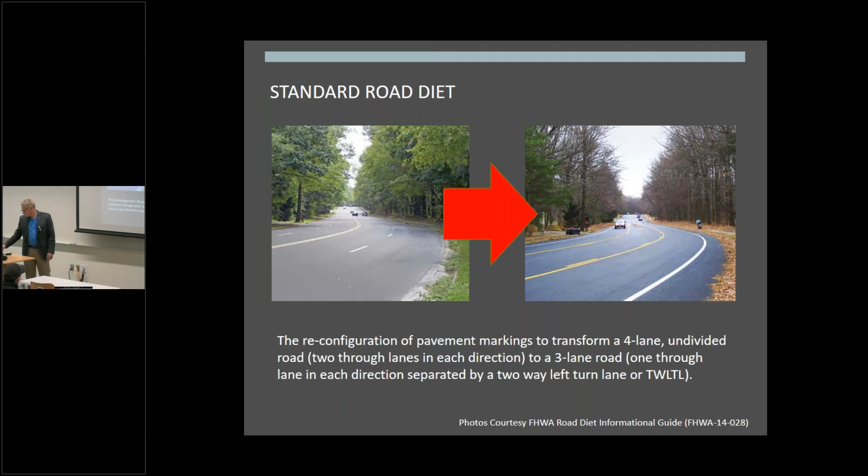All right, so we're going to refresh ourselves on what a standard road diet is before we go into the road diet version 2.0, or what I call road diet plus sometimes. The word road diet can be used to refer to any process where you reduce the number of lanes on a current roadway. But most commonly it's used to talk about a reduction from 4 lanes to 3 lanes, where you've got a 4-lane undivided road, as you see in the picture here, and it's converted to a 3-lane road with a lane in each direction and a middle lane which supports left-hand turns, known as a 2-way left turn lane, often called a twiddle, which I will be using throughout this presentation.

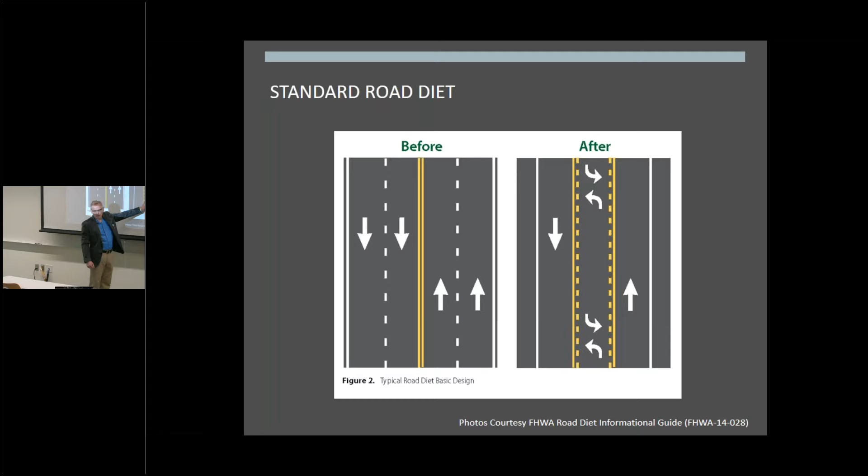Here's a plan view, schematic view, 4-lane undivided highway, converted to a 3-lane road. You obviously get some liberated right-of-way. In this example, they've put in bike lanes, unprotected bike lanes. So, standard road diet. Advantages where it's applicable. The current guidance, most popular guidance, FHWA Road Diet Informational Guide, tells us that up to 25,000 ADT on a corridor is suitable for a road diet. At least Seattle's a big proponent of these road diets, and they're applying them on corridors with that type of volume.

There's been shown to be little capacity reduction on corridors, 4-lane undivided roads, which are already essentially functioning as 3-lane roads. If you consider a 4-lane road and people wanting to take left-hand turns, those inner lanes are often filled or used for motorists to stop or slow down before executing their left-hand turn. So those kind of movements reduce your capacity, and you often end up with a 3-lane road that can carry more traffic than the original 4-lane road could.

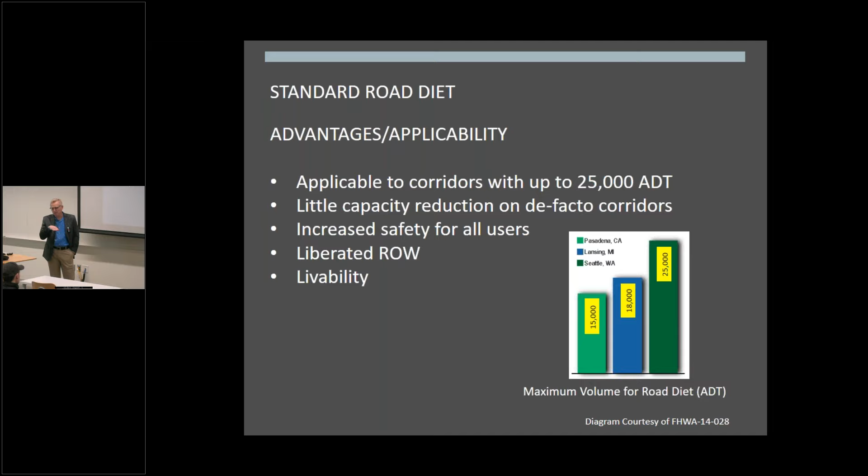Increased safety for all users. These 4-lane roads, especially when you've got a lot of those left turning movements, can be quite dangerous. You have rear end crashes. You have sideswipes when a car is trying to change lanes to avoid that car that's sitting there waiting to execute a left turn. So better safety. And you've got the right-of-way that's freed up from reducing a travel lane, which can be used to create bike lanes, bus stops, parking, whatever you want. And livability. Often a 3-lane road will calm the traffic a bit, slow down your speeds. The liberated right-of-way can be used to put in beautification components.

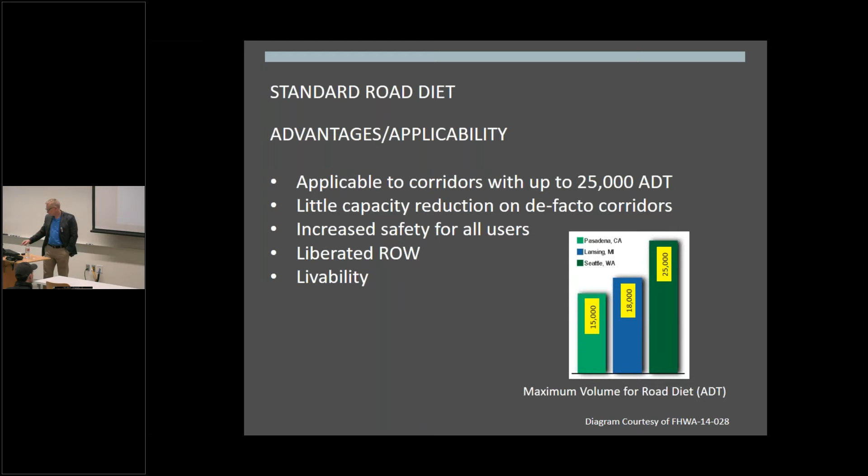Whatever a community wants to do to make that street a better street. But there are also disadvantages. They're not applicable to some corridors that might have short blocks. You may have signal timing issues, and because you reduce the number of lanes, your intersection capacity goes down. And that may not be supportable with a road diet.

If your 4-lane undivided road is truly functioning as a 4-lane road, where there are really no left-hand turn movements occurring, you do get a capacity reduction, and if you've got a corridor that's fully used, that capacity reduction might be significant. The road diet does not do anything to address safety at the intersections, nor does it do anything to address safety with your left-hand turns in the face of oncoming traffic. So these are important contributors to the safety of a corridor, which a road diet does little to impact.

The right-of-way that's liberated with a road diet can be fairly minimal. Even though you're eliminating an entire traffic lane, the TWLTL is often wider than a normal traffic lane, often 13, 14 feet wide. So you don't get that whole traffic lane back in terms of liberated right-of-way. And of course, a standard road diet isn't applicable to your higher volume corridors.

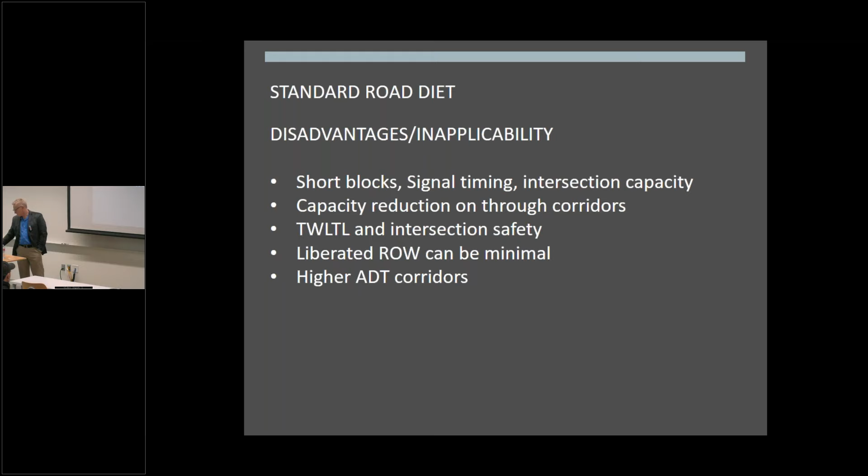So the question is, can we go one step or one lane farther? And of course the answer is yes, or I wouldn't have very much to talk about for the rest of the hour. I like to call it Road Diet version 2.0 or Road Diet Plus. And the great thing about this concept, there are no new elements, no new traffic engineering elements, no new planning elements. We have successful projects across the nation. But we're lacking both popular guidance and technical guidance, and the concept is not well known.

There are a lot of roundabout practitioners that are well aware of this concept. It is becoming more popular. I think I just saw a post from Congress for the New Urbanism. Robert Steuteville posted something on this, so it is starting to become more popular. But I think accessible guidance is one of the issues that are lacking.

So what does a corridor look like when you've taken this 4-lane undivided road and applied this road diet plus roundabout treatment to it? What are we talking about? Well, first of all, we're talking about roundabouts, at least at all the major intersections. You can still have your normal cross-street intersections, but those are to be intersections with minor roads only. It's a two-lane road. You only have 2 lanes, 1 lane in each direction. The TWLTL is gone. You've got no left turns in the entire corridor, or very few left turns.

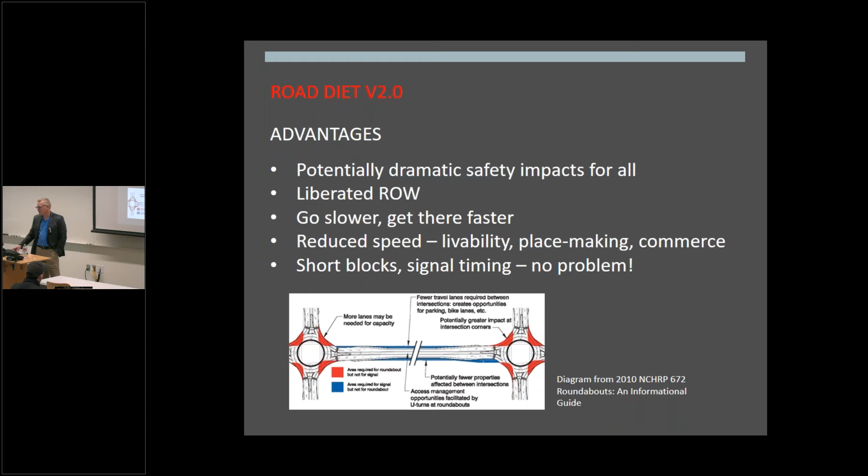Short blocks and signal timing. I say no problem here. Well, that's not completely true, but they're much less of a problem than if you're using a conventional road diet approach. So you don't get anything for free. What are the disadvantages of this road diet 2.0? Most of them are issues that need to be dealt with for roundabouts in general.

Number one, you've got small roundabouts, which means your larger vehicles may have issues getting around the roundabout. They may only be able to take a left-hand turn. Doing a U-turn may not be possible in some cases. That could be a problem if you've got a corridor where there's a lot of freight coming through. But there are ways to deal with that.

Emergency vehicles and public buses, fire trucks in particular, can have issues, again, with turning and or traversing a mountable island. A roundabout's capacity is dependent on rates of left turns and U-turns. So you've got so much capacity in that circle, and if you have a whole bunch of people coming in to do a U-turn to come back, you're going to reduce the capacity of that roundabout. So that's just something you have to take into account.

Capacity is also dependent on familiarity with roundabouts. And this is something I'll get into in a little more detail further on. But there is quite a big difference between the throughput of European roundabouts and the throughput of American roundabouts. And it's not based on design factors, it's based on the fact that Europeans have likely grown up with roundabouts, are familiar with them, know how to use them well, no big deal. With American roundabouts, drivers are not as familiar in most places, and their ability to smoothly merge into that traffic flow is less honed than their European counterparts. So you get less capacity.

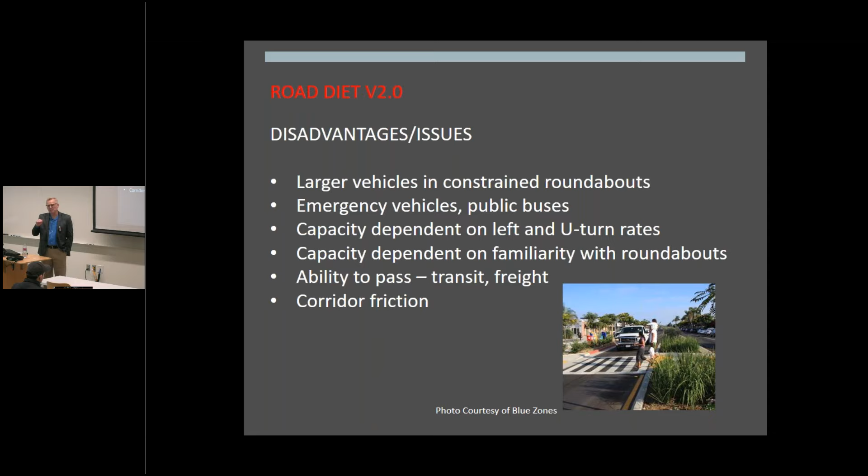So when I looked at this concept, and having been a recently converted roundabout fanatic, I couldn't understand why this concept wasn't just taking over. And so I looked at what existed out there, and I realized there's no accessible guidance for this concept.

There's actually not a whole lot of technical guidance either, but to popularize this idea, to make it more accessible, to encourage its adoption in a more widespread manner, I thought what we needed was a little bit more accessible guidance along the terms of FHWA's Road Diet Informational Guide, which has a feasibility process and some explanatory material for people who may not be as engineering oriented, but who may be important stakeholders in the process of deciding what to do with a corridor.

So I set out with my work to create a counterpart to that guide. I just went ahead and mirrored the FHWA Road Diet Informational Guide, defined the concept, talked about benefits and trade-offs, feasibility of this approach, design issues and assessment.

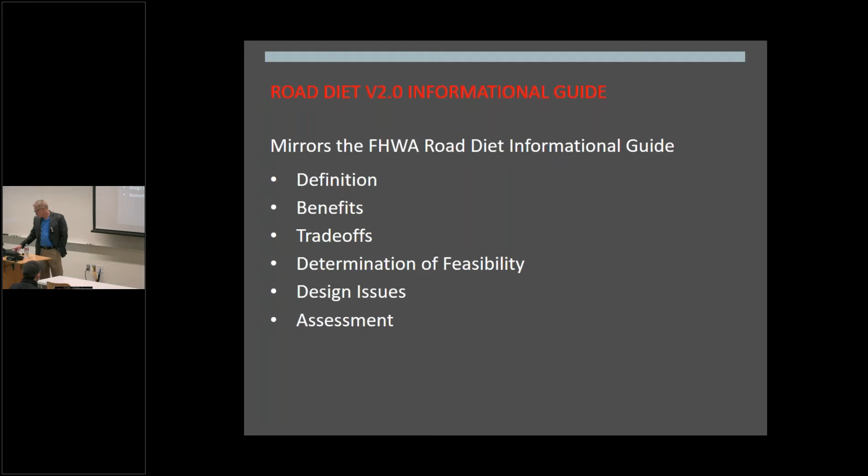And what I'm going to be talking about today is the feasibility assessment part and the work I did to come up with a cheap and easy process that people could use, say, hey, I got a corridor here. I want to do something fantastic with it. Is it feasible? And a little bit of a spoiler here. What I did came out great, but even so, it's a little too conservative, and we'll talk more about that.

So how does an agency know if a road diet 2.0 is worth doing? Well, the two major questions are, is there room at the existing intersections to place a roundabout there? One of the big barriers to tackling this kind of renovation is if you do a roundabout, roundabouts tend to be larger than normal intersections, whereas the roads in between them can be smaller.

If you're having to buy buildings and tear them down, or buy businesses and close them, number one, you might have a lot of public opposition, and number two, it's going to be pretty darn expensive to do that. So you need to know what's involved in terms of right-of-way required for those roundabouts.

And number two, what are the supportable traffic volumes for this kind of concept? You know, if I've got a busy corridor and I want to do this fairly radical concept and commit to trying to convince stakeholders that this is an idea worth considering, I've got to know that that final plan is at least going to have the possibility of supporting the volumes that you're wanting to support in that corridor, either now or in the future.

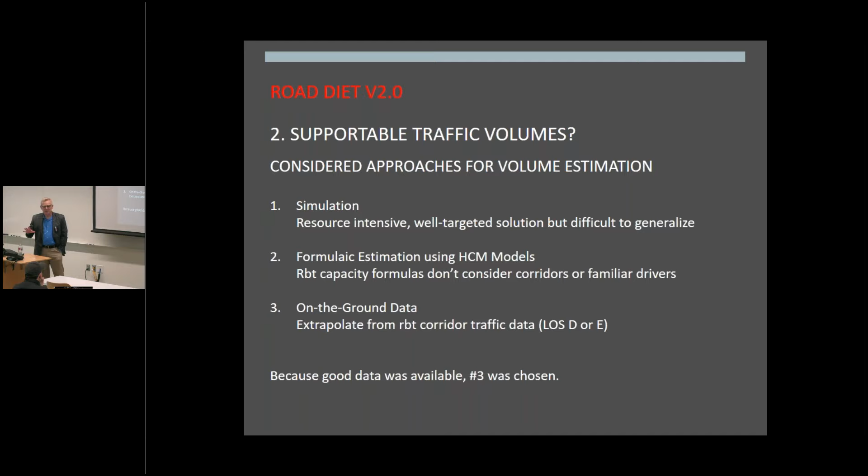So the third one was take a look at some corridor that's already been renovated in this manner and see if there might be some on-the-ground data that would tell me what these corridors can do. So I chose number 3 because I did find some good data. And in fact, the data was so good that it illuminated some drawbacks to existing roundabout throughput guidance, which, as I remarked at the beginning of this talk, I think has really been retarding the uptake of roundabouts in this country.

So what kind of data did I look at? NCHRP 772, great study. It's limited only to throughput, which is unfortunate because there are so many advantages to these roundabout-based corridors. But they had a database of roundabout corridors across the nation, and that was crucial for what I was doing.

So from their database, I looked for roundabout corridors that had at least 3 roundabouts in series, 2-lane roads rather than wider roads, single-lane roundabouts only, and didn't include a pair of roundabouts at a highway interchange, which is often something they do, which looks like a corridor, but really it's a highway interchange serviced by roundabouts.

So after using that criteria, I came up with 6 corridors that I want to take a look at. La Jolla Boulevard in San Diego, Pagan Ranch Road, Boynton Beach, Florida, Maple Island Road in Springfield, O'Neill Drive in San Juan Capistrano, West 8th Avenue in Chico, and Via Bella Street in Pennsylvania.

So I took a look at those characteristics, and I won't go too much into the details, but out of all these roundabout corridors, I chose 2 roundabouts which were representative of both the urban compact and the urban single lane roundabout. Their characteristics reflected the mean of roundabouts in that category and were examples of good use in that type of application.

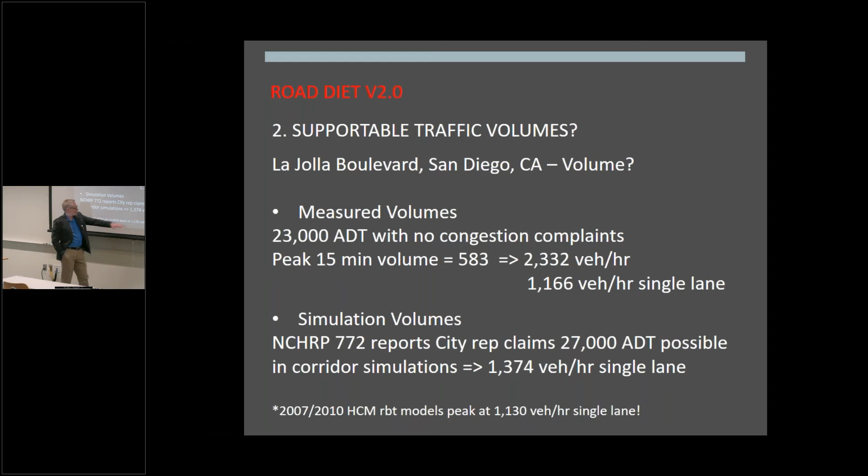This is not worrying about pedestrians crossing the road, worry about cyclists. This is only cars, ideal conditions. Numbers up here, you got peds, you got cyclists, you got real friction. So what's going on? It didn't make sense to me. Something was off, given the difference in the range of numbers and the fact that the models predicted much less throughput than what we were actually seeing with lots of real life impacts on the volumes.

And in learning more, what I found out was that there were two issues here. The first was this corridor had low left turn rates, and their minor streets coming into the roundabouts had fairly low volumes. So if you think about it, a roundabout that's primarily supporting through traffic really becomes just a traffic calming element. A little bit of horizontal deflection and you're on your way. So that could help explain why roundabouts in this corridor were showing performance that wasn't predicted by the model at all.

But really the key to the difference here is that the models that are used in the Highway Capacity Manual were created by looking at American drivers going through roundabouts. And so when you take a capacity model that's based on a driver that's unfamiliar with a roundabout, you're going to get lower capacity, as I talked about before. So the model assumes unfamiliar drivers to some extent. You get a corridor where people become familiar with the roundabouts, start learning how to use them more efficiently, you get this difference between actual volumes and what the models predict.

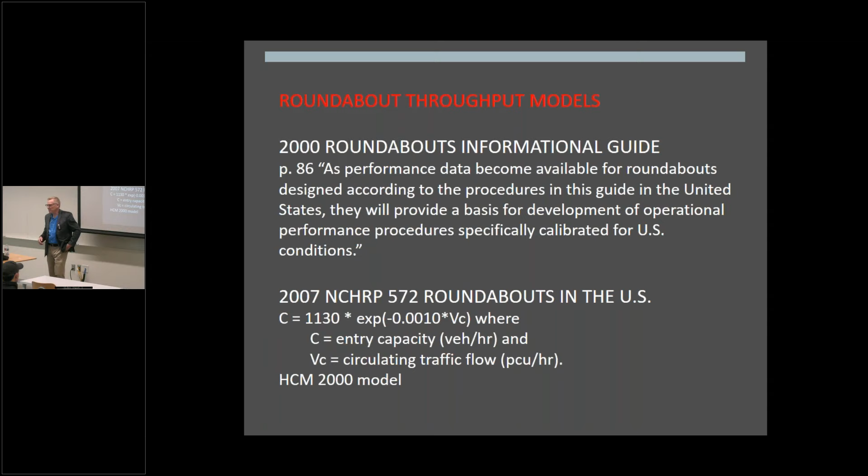So here I'm going to jump over a little bit, talk about the models and their progress. Back in 2000, first Roundabouts informational guide, they had no model, but they said, hey, as soon as performance data for these roundabouts start becoming available in the United States, we can use that data to create the models. 2007 roundabout NCHRP report created a model. Here's that 1130 I talked about earlier. That's the max throughput you can expect from a roundabout. This is also the formula that's used in the Highway Capacity Manual for 2000.

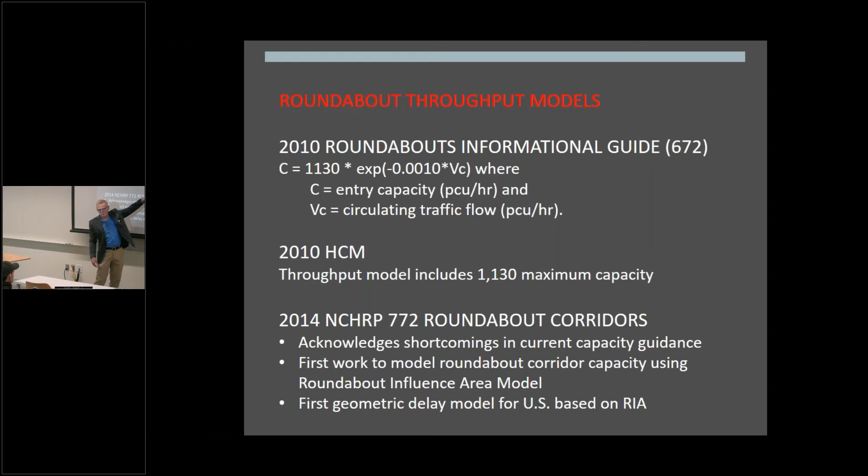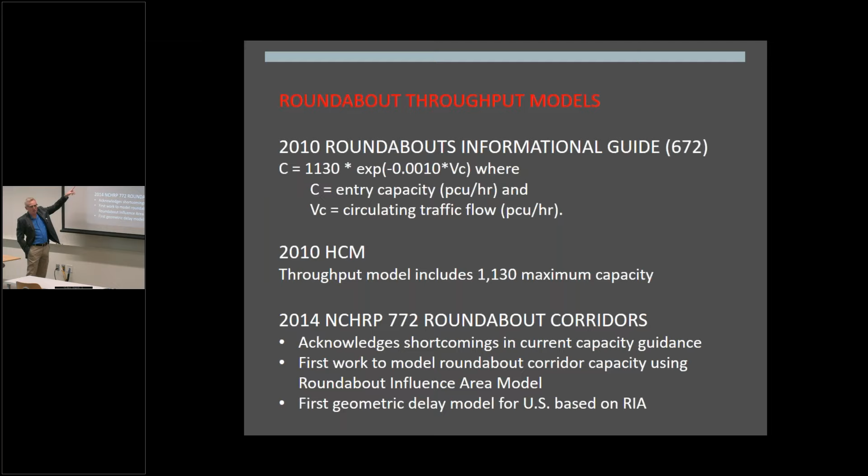2010 roundabout informational guide, second edition, same model, no change yet. Also 2010 Highway Capacity Manual, same model. So we're still there, but 2014 NCHRP 772 report, the roundabout corridor study, they started saying, hey, something's not right here. We're seeing a difference. They acknowledge the shortcomings in the current capacity guidance. They created a new model for roundabout corridors. Works differently than the models previously, which only looked at roundabouts in isolation. So they're working towards something that's more applicable to this environment.

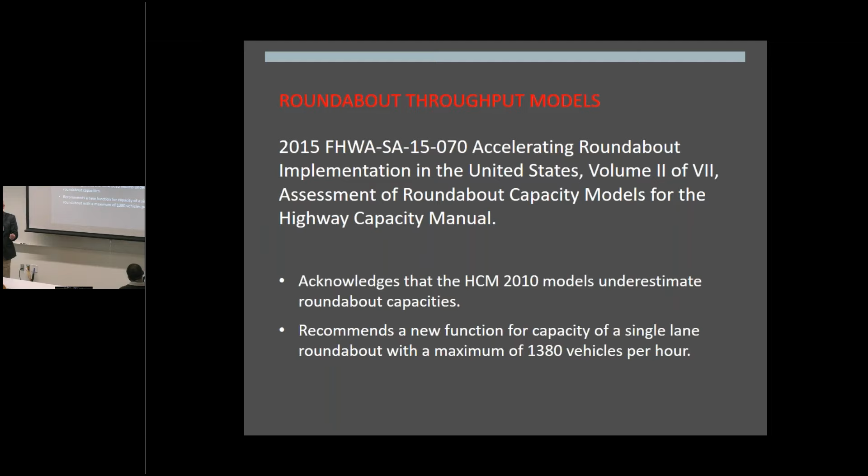Finally, in 2015, around about the time I was doing this work, a little before, there was a 7-volume series whose goal it was to accelerate the use of roundabouts in the country. And one of their volumes took a look at roundabout capacity models. And they acknowledged that the Highway Capacity Manual underestimated roundabout capacities and recommended a new function for predicting capacity. And if you look at the maximum there, 1380, that lines up quite well with what the city of San Diego said their simulation showed, I think 1374 if I remember correctly. So we're starting to see the guidance catch up with what's happening on the ground.

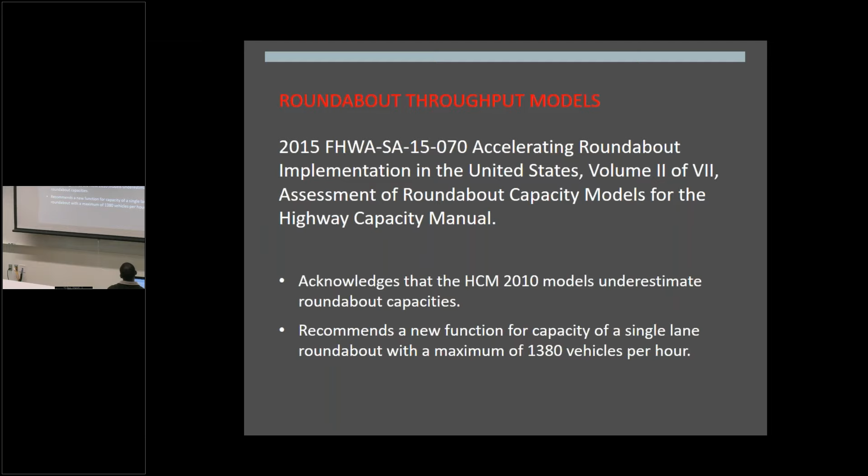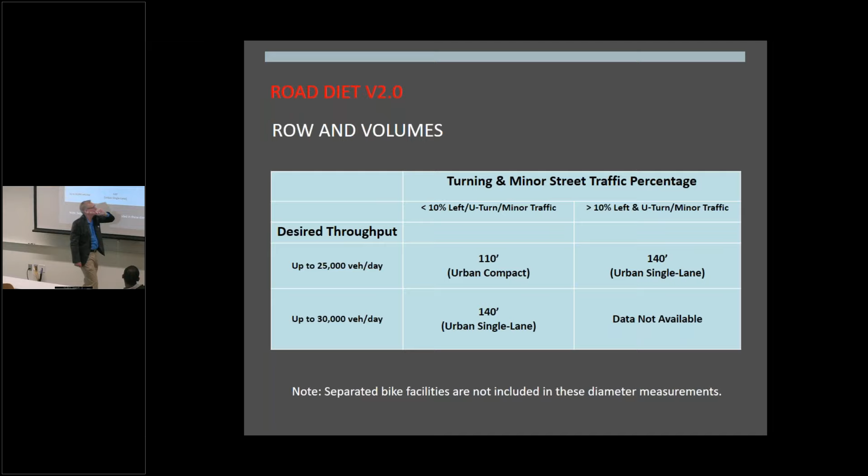So all this work on the feasibility assessment portion of the traffic guidance kind of distilled into this table here, which just tells you that if you pick your desired throughput for your corridor, and I had to split it up by percentage of left turns and U-turns, because that's the model or paradigm that my data could support, this guidance tells you what size of roundabout you need to support that kind of traffic volume. So that's your feasibility assessment.

And I would kind of taper off here and tell you about the accessible guidance I created and encourage everybody to spread the word. But just a couple weeks ago, I'm talking to a traffic engineer in New Zealand, big roundabout fan, Duncan Campbell. Thank you, Duncan, if you happen to be watching this. Tells me about a roundabout in Henderson, Auckland, New Zealand. Blew my mind. All right, so let me go back to, if I can.

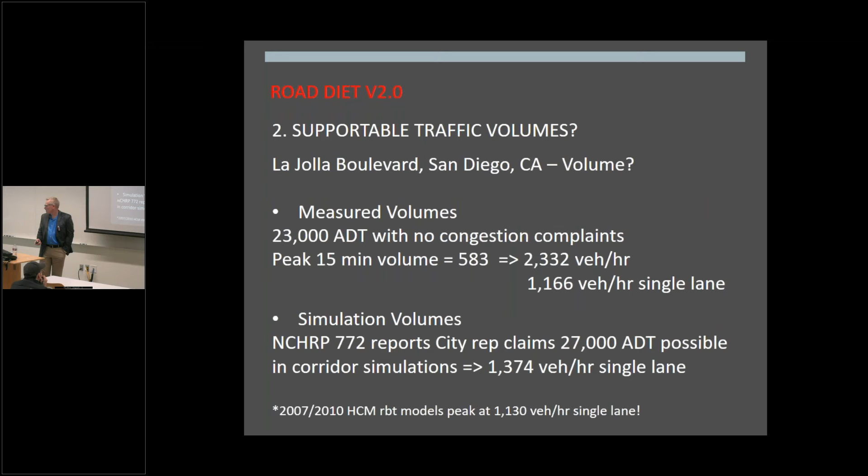Oh, now it works. I forgot to make a point here. Where did I pass my table? There we go. The point I forgot to make is that for these throughput levels, current roundabout guidance currently says for an urban compact roundabout, you should only expect 15,000 vehicles a day. Single lane roundabout, 20,000 vehicles a day.

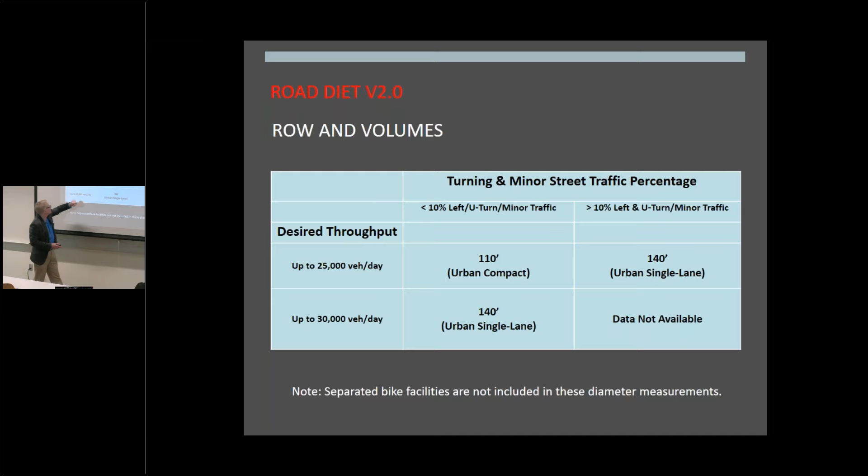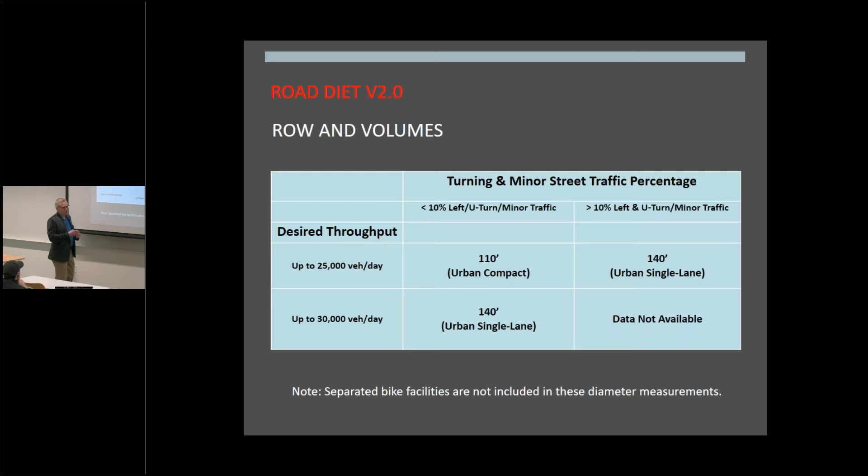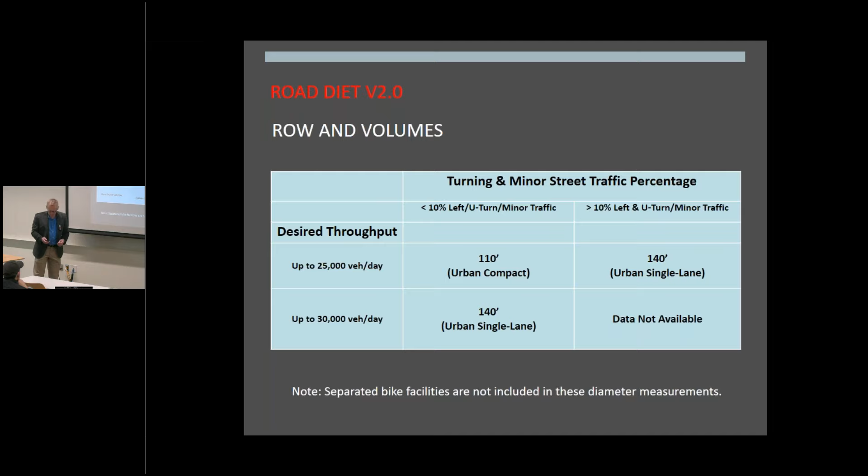So current roundabout guidance significantly underestimates how many cars you can get through, which is what I was referring to when I said, hey, I think current guidance is really retarding the uptake of roundabouts, both in isolation and in the corridor setting. So this is significantly greater than what we're seeing in the current guidance.

I don't know what the other land uses are, but on Duncan's website, he has an hour-long video showing this roundabout. Plenty of people walking, cycling through this thing. But the amazing thing to me is this mini roundabout is smaller than the urban compact roundabout. And in current guidance, at least for this country, they say to expect only 10,000 cars a day through a roundabout like this. They're doing 30,000. He says there are some queues that develop at peak times, about 100 meters, so 10 to 15 cars maybe. But that's only at peak times.